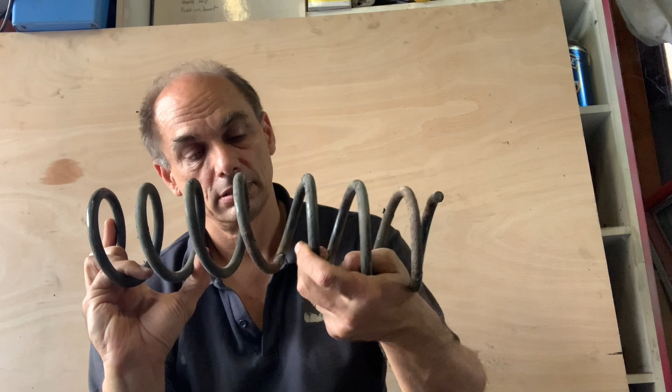So in this episode, we replace a broken spring and a good rear spring coil on the Mark II Ford Focus. It's a good episode and really quite a simple job. What do you need for it? You need a jack, a couple of stands, a few spanners and a torque wrench, and you're good to do it all. So it's not a hard job, and the savings are well worth it.

Right, today we're going to replace the springs, the coils on the rear of the Mark II Focus. The reason being that the one on the right hand side is broken and it's a bit tight just here, so we're going to do one wheel at a time. Once we've done one, we'll move the car out, bring it back and do the other one.

So the process here is we'll chock up the front of the car, loosen up the wheel, jack it up, take the wheel off. We remove the nut for the sway bar at the back. We are then going to need to put some pressure underneath the spring. Might not need to on this side because it's broken. Use a spring compressor to pull it all together. Then we should be able to lower the jack, remove the spring and put in a new one. So let's start by putting some chocks at the front.

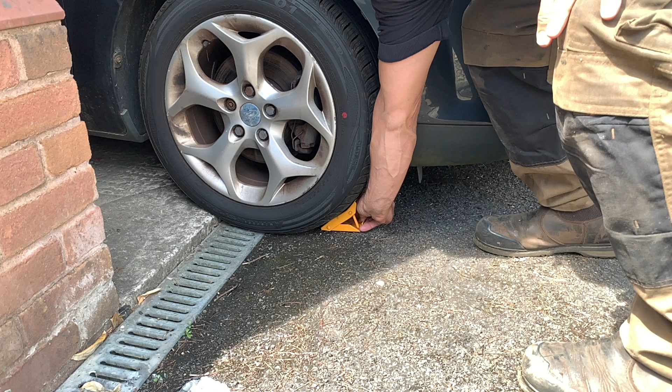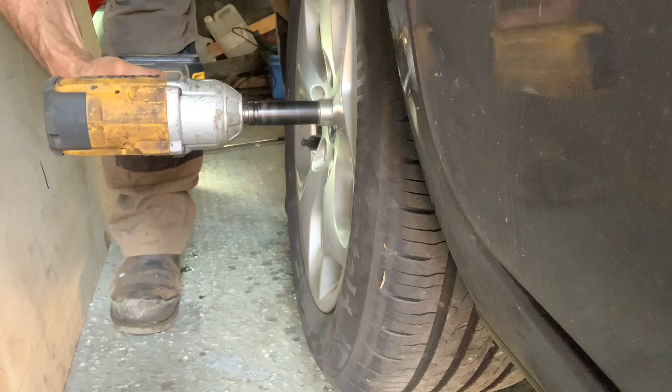Okay, next we'll loosen off this wheel and take it off. Before taking the wheel off, I decided it was a good idea to get it up. So I've got it up on two stands, one at each side. So we'll take the wheel off now. You can see I've chocked it up both there and the equivalent on this side. So we're nice and secure underneath, so we're safe to go under.

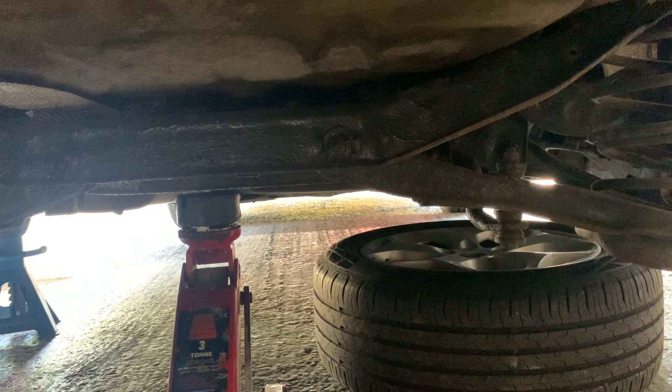So what we're now looking at is the sway bar. We're going to need to take this out and we're going to want to support this from underneath. And you can see how badly this is broken. I don't think I'll bother to get any pressure on that. I think it's just so broken. Is that stupid or not? No, we'll put something on it for safety. Okay.

Right, we're going to give ourselves the best chance with this by giving it a bit of a scrub. We're going to give it some WD-40. So the top of this appears to be a 15mm and the bottom seems to be a 16, but I don't seem to have a 16 anywhere. This is a 17mm. And you can see the movement there. This is a 15mm. And it won't go on. So that would imply a 16, but I don't have a 16. I highly doubt that it's non-metric. Right.

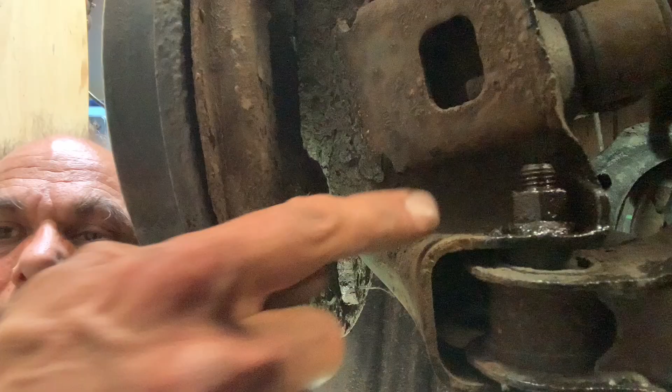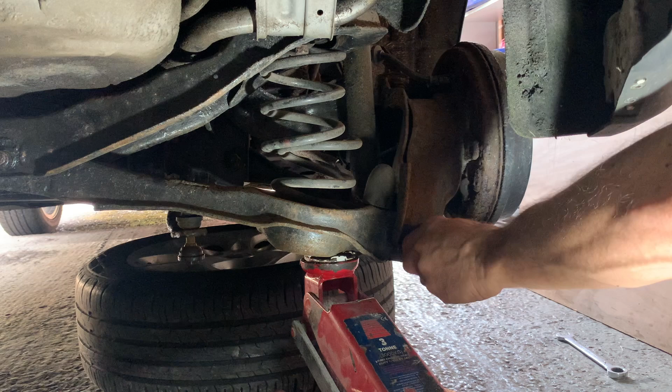So this is a 15 here. The other side looks awkward to get at. I'm going to show you. So this is the other side right here. And there's no way I can get any kind of ratchet on that. So I'm going to see what spanners I have and see if I can get anything on there. 19 felt too big, but 17 is too small, and I don't have an 18. So we're going to try with this. Let's see how we get on.

Right, it might actually be fixed in place on that side. It might not need anything. Yeah, I think that must be a fixed one. Right, I think now we're going to try lowering it and see what happens. Right, we'll try whacking it first and then we'll try a crowbar.

Right. So did I need to take this out of the way? So here the problem I've got is in fact the sway bar is stopping it from coming down. It's not just the bolt being in there, it's the whole sway bar has to twist down in order to get this out. So I'm going to take the sway bar off on the other side and repeat the process.

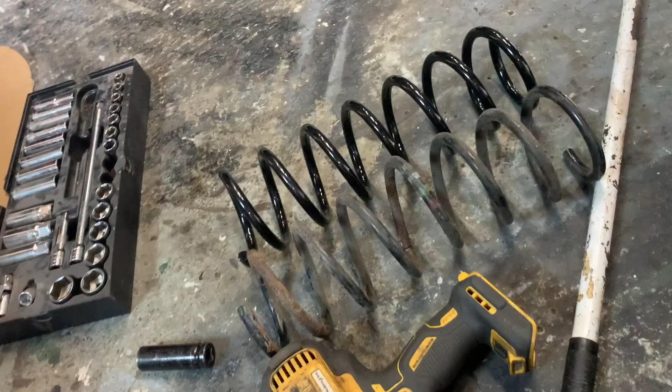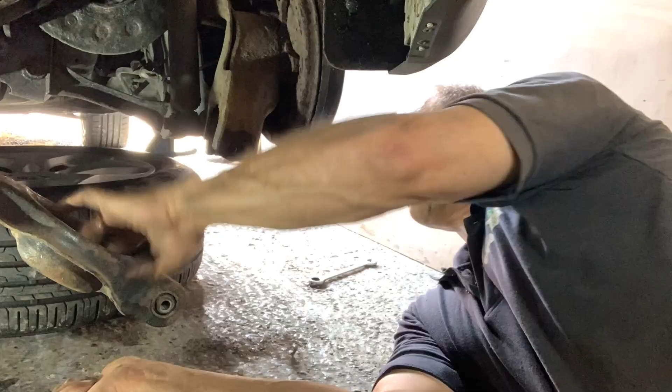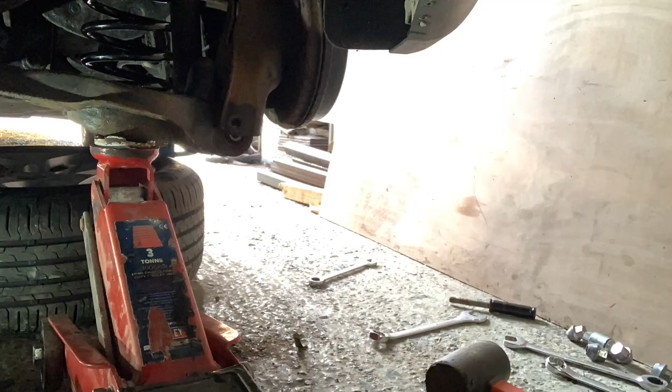No, I mean, without compressing it, there's no way I'm going to get it in there. So, oh, that is not wanting to twist for me at all. Right, have a second go at this. I managed to get underneath and twist that a little bit so that I seem to get some space. You can see here. Whoa! You can see there I got something a bit wrong. Bloody hell. But it slips in just now. Gosh, that would have been nice.

Okay, the problem I'm having here is this bolt is not lining up at the other end for some reason, and I can't quite work out why. I mean, it implies that this isn't all straight, so I don't know if I have to do up the sway bar first in order to get some pressure up there, or if maybe I need something underneath here as well to add a bit of jacking. So I think I'll do a bit of work off camera and see if I can work out how to do it. I gave it a tap with persuasion, and it went straight in and is now tightening up.

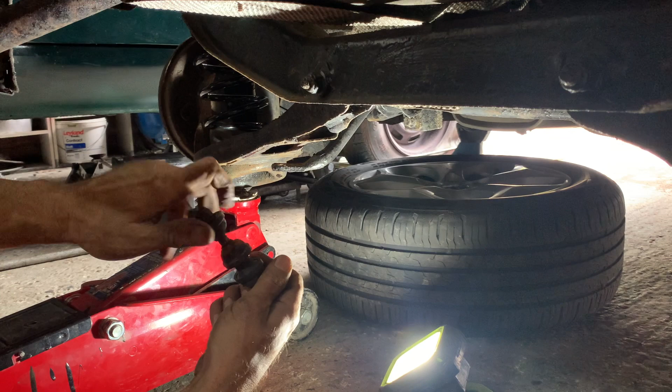Having done the right hand side, the left hand side was very quick. I now need to reattach the sway bar, anti-roll bar if you live in the States, which I don't think should be too hard, but we'll have a look. Oh, that was actually super easy. I've done the one side, so it really is just a case of, it comes in, it's got 3 bits to it. The top with the nut on, bushes in the middle, and the bit underneath. I hope that's not all just my head. So I might have to put that up just to get that one to catch. And now I need to tighten those up.

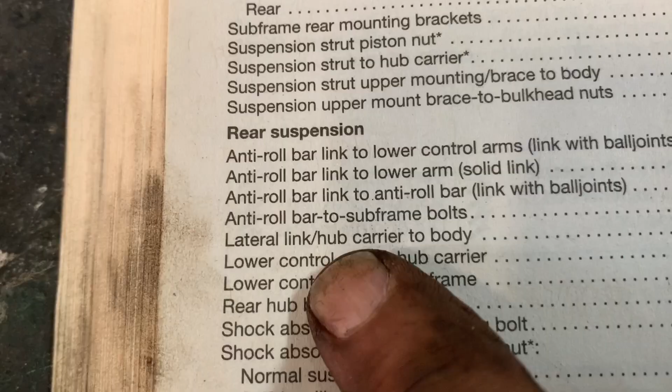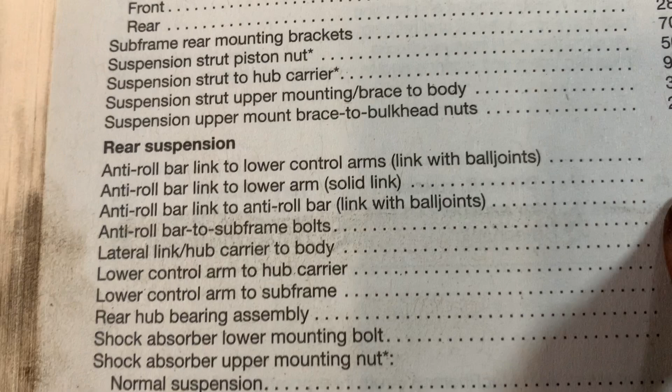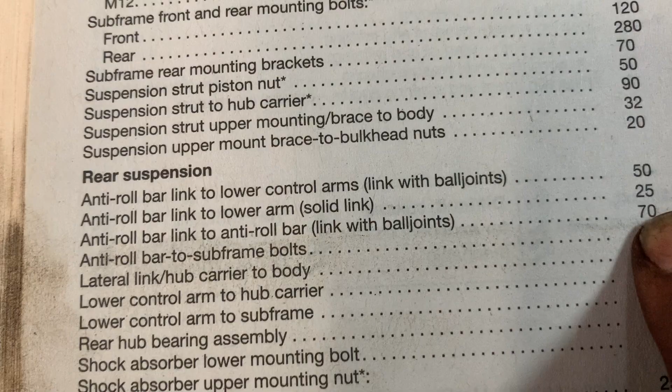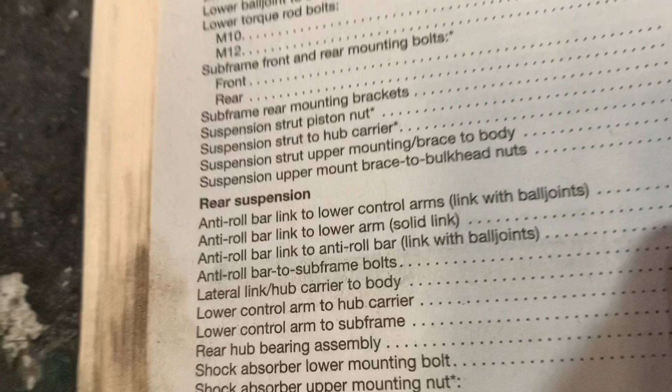So it looks to me, we've got an anti-roll bar link to lower arm, solid link, 25 Newton meters, or with ball joints, 70. Now, I don't believe those are ball joints in there. Ball joints is something you split apart. So, I'm going to assume it's the 25. And the other reason that I'm assuming that is, having done it up to 25, you can see it is pointing out through the threads about as much as I'd expect. So I'm going to assume that's good. So we're going to get the wheels back on and torque those up and then take it out.

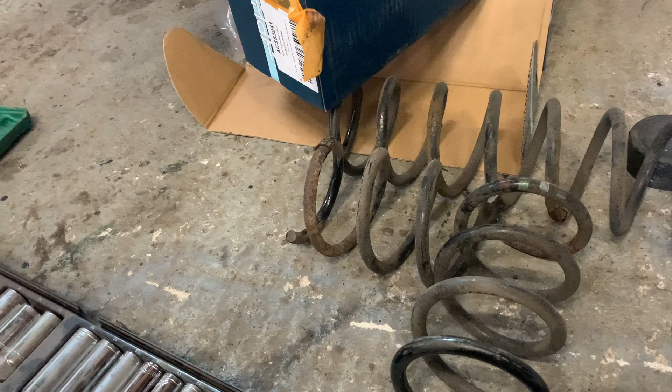I just want to say I got these springs, I think on eBay. It was 25 quid for 2. When I looked on Ford for the springs for this car, it was £151 each. And you should always replace these springs in pairs. So £300 against 25. We'll see how long they last. But, you know, if they go a couple of years, then it ends up being worth it.

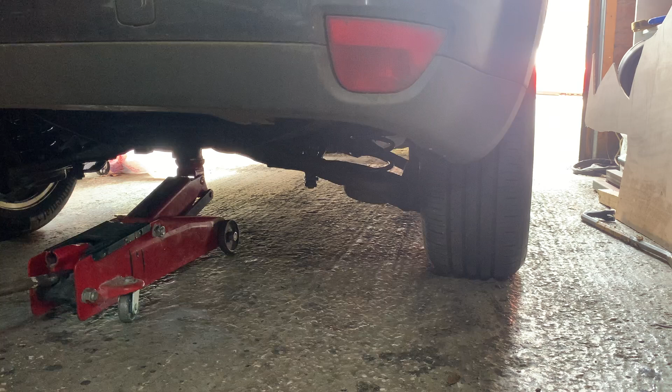I'm about to lower the car. No, I'm not. Yes, I am, but I just need to get the stands out. And so we can now see if these springs at least hold up to being lowered to the ground. Okay, good. And there it is, back in its parking space, probably not to be used for another couple of months. But the springs are now good, and so it is ready to use when I need it to.